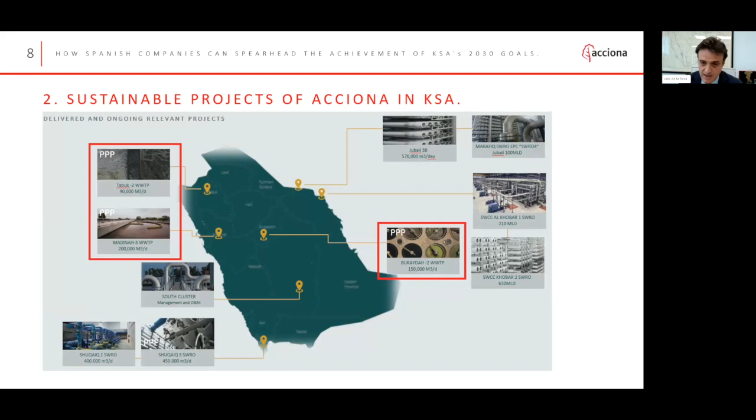We have developed 6 desalination plants: 2 units in Al Khobar in Dammam, 2 units in Shuqaiq, and 2 units in Jubail, one of them for Marafiq. This brings the total desalinated capacity of ACCIONA today in the kingdom to 2.3 million cubic meters per day, able to provide potable water to 9 million people here in the country, more than 25% of the population.

Many things have been said about the sustainability of desalination in the last months and years, and I can assure you that today the desalination plants implemented by ACCIONA are either carbon neutral or carbon positive. First of all, many things have been said about the brine. For you to know, before we decide to go ahead with any desalination project, a really detailed recirculation study is conducted before defining the point where we take the water and where we deliver the brine.

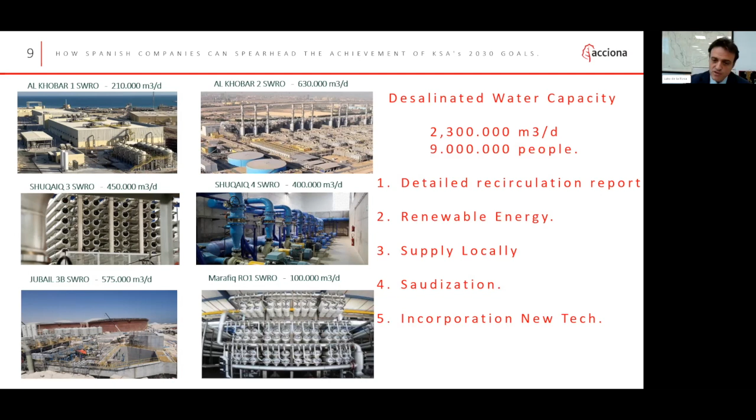We are incorporating renewable energy, trying to fit the plant with as much renewable energy as possible, mainly PV. We develop our relationship with local suppliers as much as possible, and incorporate Saudi nationals into the project as much as possible, always fulfilling the legal requirements. We always incorporate new technologies into all these projects as much as we can. And where is this taking us?

We are stating that we are able to provide potable water in an amount, quality, reliability, and affordability as much as possible. And you can see at the bottom part of this presentation, I referred before to the renewable part of the desalination plants.

Today, in an average desalination plant developed here in the kingdom, if we consider this rectangle as 100% of the plot for any desalination plant, what is purely the desalination units is around 35% of the area, while the photovoltaic part is around 65%. This is what allows us to provide between 30 to 50%, depending on the plant, of the total energy consumed by the desalination plant through renewable energy.

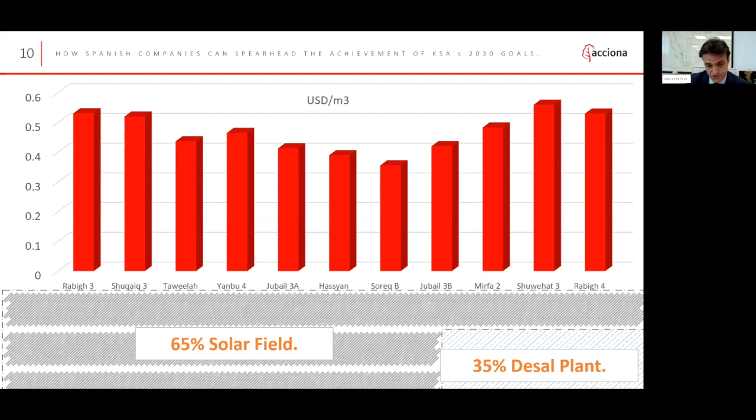So we have sustainable potable water, not only for urban but as well for industrial uses. We said that we incorporate new technology, but this is not something we said just for saying something.

It's something recognized worldwide. We got the Global Water Award, the distinction from the Global Water Award, for the digital twin that we implemented in Al Khobar 1. A digital twin is a digital replica of the asset we are about to construct, and this digital replica allows us to simulate how the asset will work. This allows us to optimize the consumption in terms of chemicals and energy of the asset.

As well, we develop the relationship with our local Saudi partner, in this particular case Saline Water Conversion Corporation, and we have a very close relationship with them for renewable and new technology. They even pay visits to our facilities in Spain to strengthen the relationship.

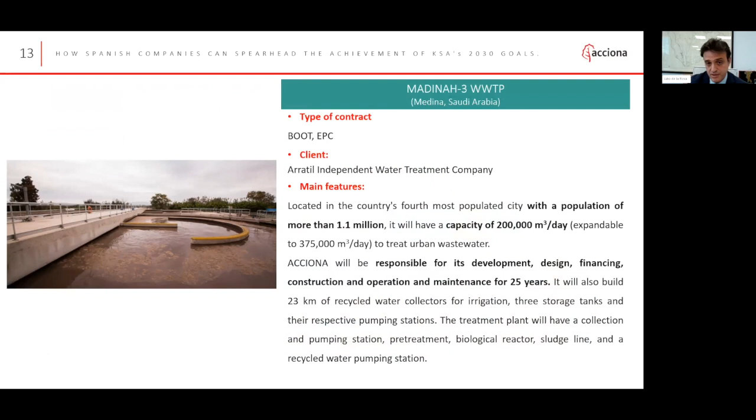This is for desalination. What about sewage treatment plants? We have provided the investment, the money needed to develop 3 projects here in the kingdom: one in Medina, 200,000 cubic meters per day capacity; another in Buraida, 150,000 cubic meters per day capacity; and another in Tabuk with 90,000, totalizing 440,000 cubic meters per day capacity of sewage treatment plants here in the kingdom, able to provide sanitation to 1.6 million people.

And this is maybe the most perfect example of circularity and sustainability in a water project. We take the raw sewage that you have at home or in any industry, we treat it, and we get treated water and sludge, and we sell this to farmers to irrigate crops, for food, for greenery in general. We also provide them the sludge as a natural fertilizer.

So with this plant, first of all, we avoid the use of fresh resources for irrigation, and at the same time reduce the use of traditional chemical fertilizers. As well, this plant is fed again through photovoltaic and the biogas produced in the plant itself through the methanization of the sludge we produce.

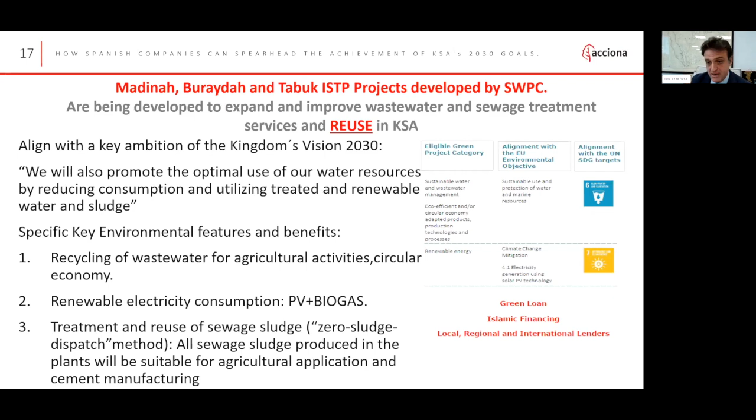So this project, as we said before, is the perfect example of a net zero project supporting the circular economy. This is why it was the first green financing project. What is a green financing project? If you present to the financial institution a project that is fulfilling some of the United Nations Sustainable Development Goals,

and you can assure that every single dollar invested in this project is allocated to a sustainable project, you can call a second party opinion, in this particular case ISP Global, to certify all this, and you can have access to what is called green financing. More and more investors, and Saudi itself, are promoting this kind of project. More funds are available for green financing projects, and at the end of the day, more availability means cheaper money.

And the last project I would like to present to you is the South Cluster project that we are doing in Saudi Arabia, in the region of Baha, Assir, Najran, and Jazan. This area is equivalent to half of Spain, for 5 million people.

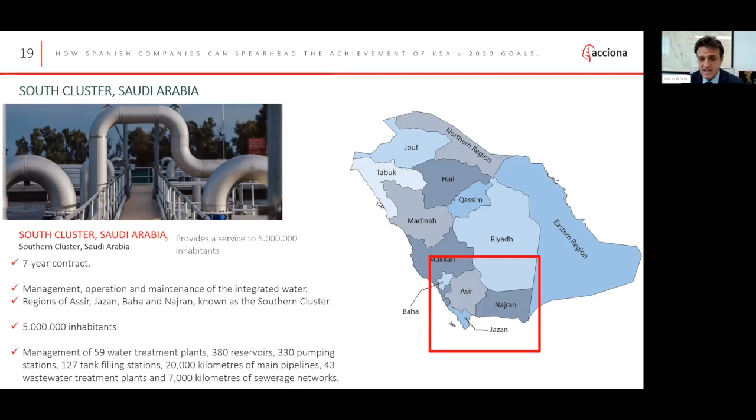What we are doing is helping the national water company in the transition from a pure public entity to a pure private entity, providing optimization in the 59 water treatment plants they have, the 43 wastewater treatment plants, and most importantly, implementing more efficient management skills in the whole water cycle.

So, this is what you are doing, but why do you consider that this is helping the achievement of the 2030 goals? Let's have a look at Vision 2030 under the PIF program. PIF is the Saudi Fund for Investment, the National Pension Fund of Saudi Arabia.

The target is divided into 3 levels, here I'm showing only 2. The targets are to grow and diversify the economy - ACCIONA is investing - and to increase employment - ACCIONA is employing people here in the kingdom.

To contribute to the growth of the private sector by providing potable water, we help industry grow. To maximize the value capture from the energy sector, we are implementing renewable energy. To unlock and grow the non-oil export, the water sector itself is a pure non-oil sector. And to further integrate the Saudi economy regionally and globally, we are helping, investing, and developing the economy of the country. So we are helping with this target too.

The Green Initiative consists in increasing the number of trees in the country from 10 million in 2021 to 600 million by 2030. Those trees need water, and part of it comes from the sewage treatment we are developing. We mentioned 3 locations: Tabuk, Medina, and Qassim. In these 3 locations where we have sewage treatment plants, this Green Initiative in Saudi Arabia increases the number of trees significantly.

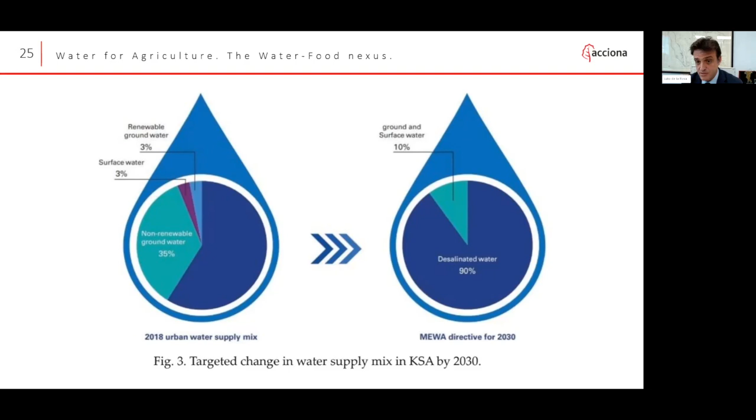As well, local content and Saudization. Saudization means employment of Saudi nationals, and localization means the use of local suppliers and companies. The requirements are getting higher and higher - right now, for operation and maintenance of water plants in the kingdom, the requirement during the first six years is 70% Saudi nationals, and from year 7 onwards, 90%. We are fulfilling this.

There are also requirements to incorporate local companies for operation and maintenance - right now around 30%, and we are fulfilling this objective. As well, more than 50% of the supply implemented in any project here in the kingdom must be local, and we are fulfilling this.

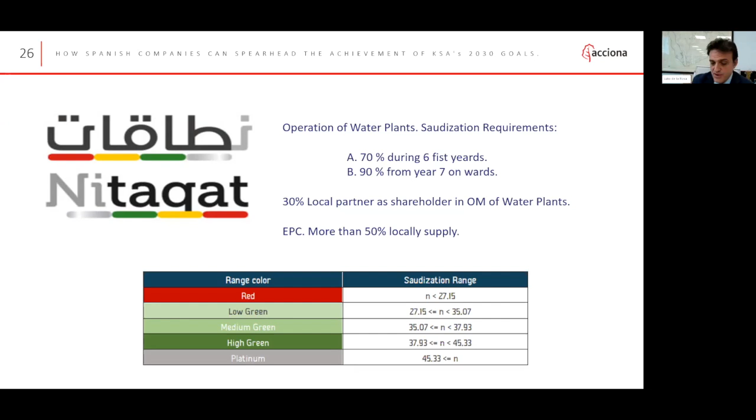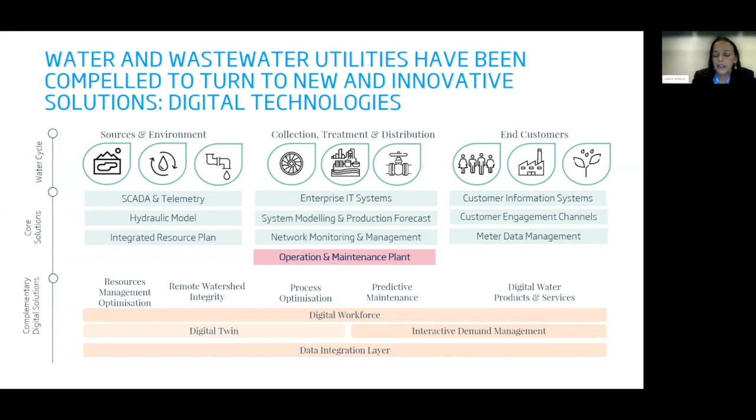Oblysis is technology focused on the transformation of the plant. We are focusing on transformation in the sludge. The activated sludge plant is going to transform into granular sludge. This means the granular sludge has a higher specific weight and certain properties.

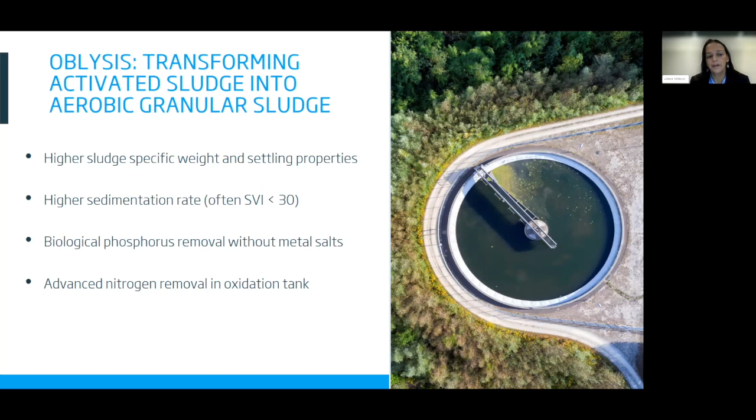The granular sludge has a high sedimentation rate with an SVI less than 30, biological phosphorus removal without metal salts, and advanced nitrogen removal in the oxidation tank.

Why are we doing that? Because we are looking to reduce different problems that we have in the plants. We are going to reduce sludge production, increase the capacity and quality of the water, help reduce chemical consumption, and adapt our technology to any activated sludge wastewater treatment.

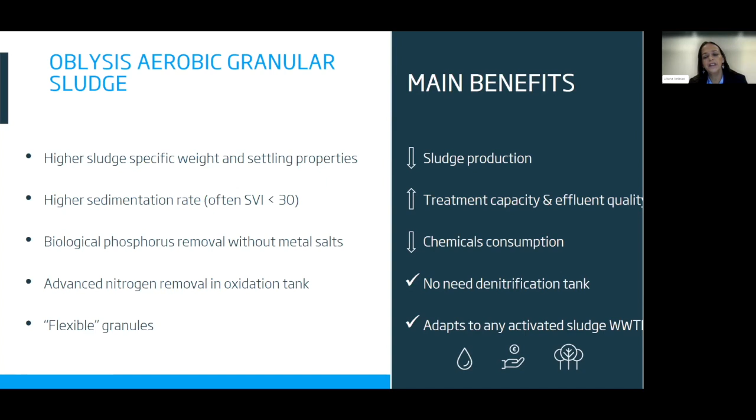How can we help different companies reach their goals? We can focus on the main problem the plant has at the moment, like capacity, water quality, or sludge production. We have the opportunity to focus on different goals, or you can balance the different objectives you have in the plant.

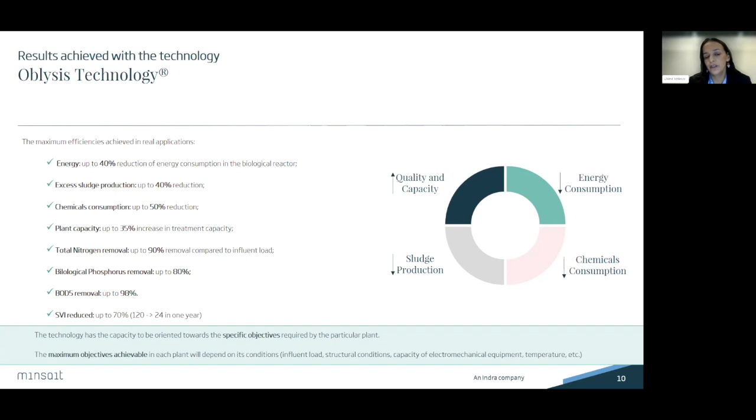How can we implement this technology? We have one part hardware, another part software. The hardware is a floating steel device. We are going to implement this technology in the biological reactor.

You can see the characteristics of this device in the picture. The physical dimensions are 2 meters by 2 meters by 2 meters. The weight is only 800 kilograms. Energy consumption is low, only 5 kilowatt-hours per day.

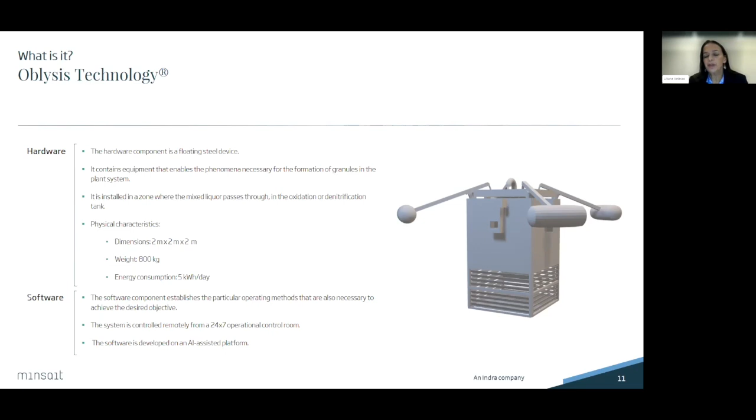We integrate this hardware with our platform. This platform helps connect different devices in the plant, and we control the process remotely through the control room, looking for the granular sludge formation in the process.

We connect the device with the aeration devices, the mixer, and the recirculation pumps, and we control these devices. We get information from the pumps, from the SCADA, and other devices, and we decide the best moment to start the aeration devices to get the best oxygen level in the biological reactor. This process helps transformation, and the flow gets inside the Oblysis device to transform the sludge.

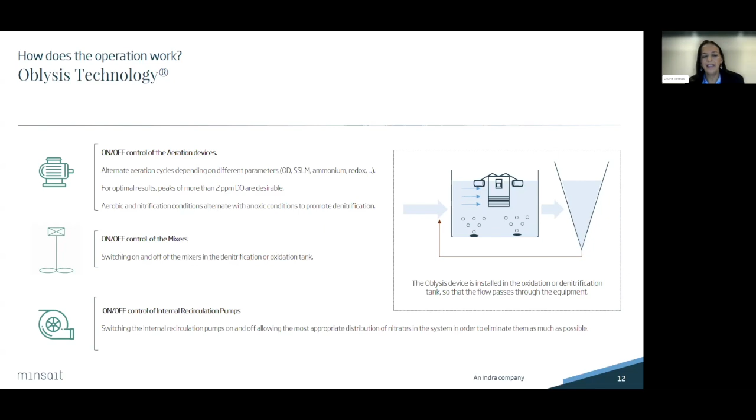What kind of plant can we implement this technology in? We can implement it in conventional activated sludge plants, Carrousel systems, or MBR with external filtration. The biological reactor tank size, 2.5 to 6 meters, is okay for implementing our technology.

About the aeration system, we have different plants with blowers, turbines, or submerged aerators. We don't have restrictions about size because we can adapt or implement different devices depending on the characteristics of the plant. We have to check what is necessary, how many devices are needed. About the type of wastewater, urban or industrial, it's possible to implement the technology.

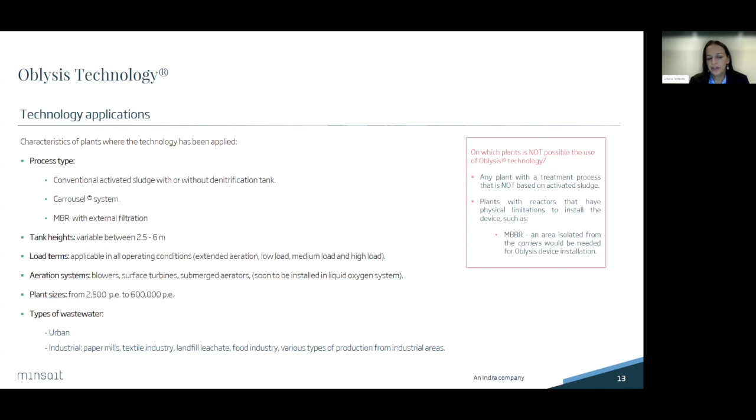We have different conditions needed to get the transformation of the sludge. The main characteristic is the oxygen level in the biological reactor. We operate around 2 ppm of dissolved oxygen. We have to review the technical point of view of the plant to check if adaptation is necessary, but usually you don't have to do any adaptation.

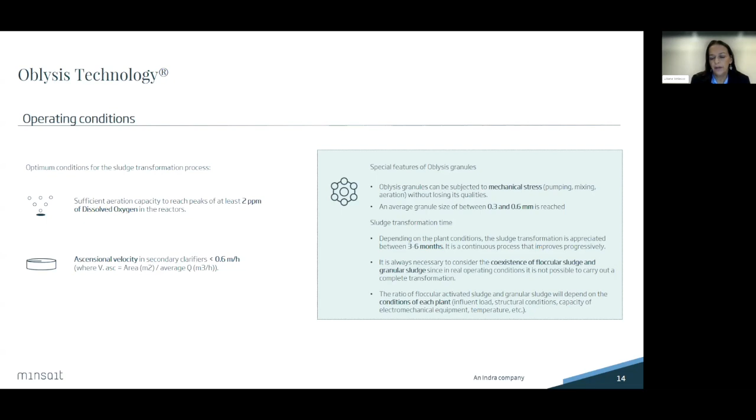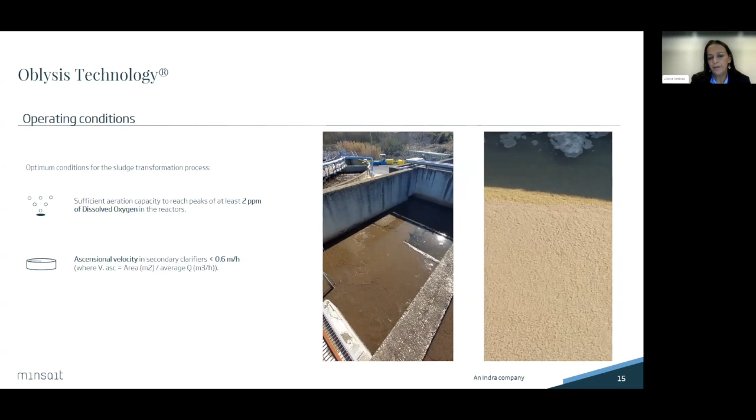You can see here some videos of the process, the sludge changing. It's going through transformation and helping achieve different goals. We work with the platform.

This platform helps the client control the different parameters that you want to control, because if you are focused on the characteristic of the effluent, we can review the parameters and control what happened in the plant, what happened with the different goals, because we have to identify the baseline we are going to work with when we start the project, and follow the different objectives that we have.

And the platform helps operate the device and look for the best opportunity to focus on the operational aspects of the plant.

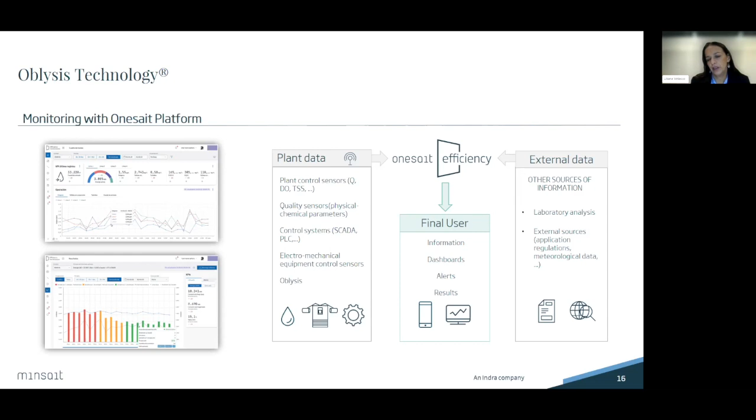How can we do this kind of project? The first step is we have to know the plant, the characteristics. We have to identify different parameters and identify different goals that you have in your plant.

Then we have to prepare, when we know this plant is possible to implement the technology, we are going to prepare the plant to install the device.

We can identify the different information of the plant. We can have the definition of the different integration, systems, or devices that we have in the plant to get information. After that, we have the information.

We have to install the device in the biological reactor. It's so easy, you only have to implement this technology in 2 or 4 hours. You don't have to do any modification in the plant infrastructure.

We have to connect to the aeration devices, and we have to calibrate. We need 2 or 3 weeks to calibrate the device, and then we can start the operation with the Oblysis technology, focusing on the different objectives that we have.

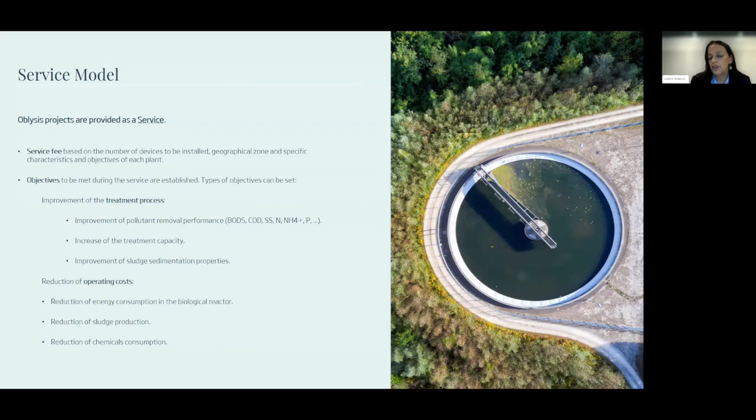This device, we have a service, we don't sell the device. We have a service model, the service fee. We have defined different objectives about the quality of the water, or maybe we have problems with operation cost. We can work on different objectives too.

We have different projects here in Spain, in Italy, in Portugal. We are looking at other countries to implement this technology, because we want to give the opportunity to understand how this kind of technology helps the plant.

This is the idea, for example in this kind of plant we have different objectives. Here in Spain, we have problems with the high cost of energy. In Italy, for example, the price of sludge management is so high. There's new regulation regarding the effluent, and it's important to control the quality and parameters of the water.

Okay, thank you everyone.

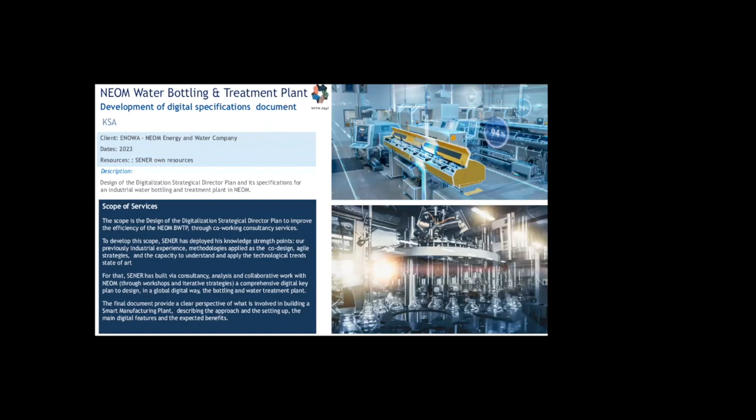We have been working with NEOM on different projects, developing materials and specifications and products in contact with water for treatment plants, sewage treatment plants, desalination plants, transmission lines, pumping stations, and also specific projects for water bottling and treatment plants.

Also helping NEOM with this integrated water management control system.

I want to say that SENER is not an EPC company for plants, but an engineering firm providing engineering services to the EPC companies in the bid phase, detailing, and construction phases.

Okay, now we are going to talk about water and desalination plant efficiency and sustainable design and management.

This is applicable to any kind of plant: independent sewage treatment plants, independent water treatment plants, transmission pipelines, water storage tanks, etc.

Rather than talking about the reverse osmosis desalination process that is well known and in continuous improvement of efficiency by equipment designers and manufacturers, I'm going to talk about the management of a desalination plant as an energy asset, from the design phase and also in plants already in operation, and how we can optimize the design of the plant and the operation of the plant from an energy optimization point of view.

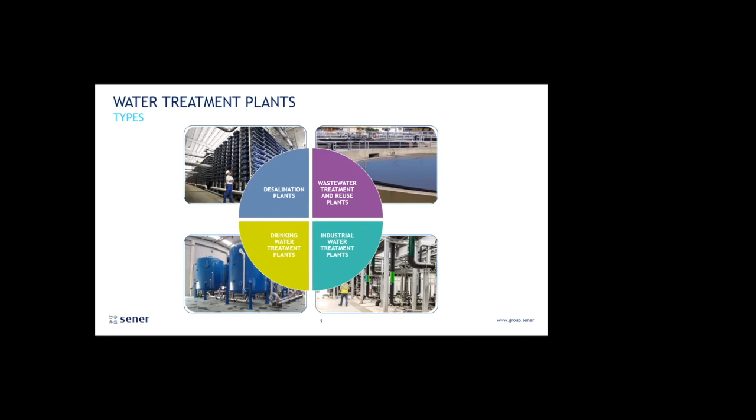These plants are intensive consumers of energy. This is well known, and our focus is to try to optimize this mix.

First of all, the traditional design procedures, well known. This habitual design process calculation, 2D and 3D plans. This is the initial design procedures.

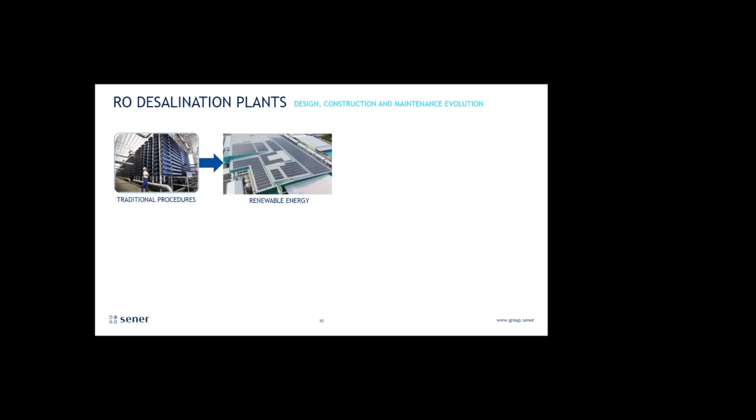Then renewable energy has been implemented in the plants. Also, this is a second step to the sustainability of the plants.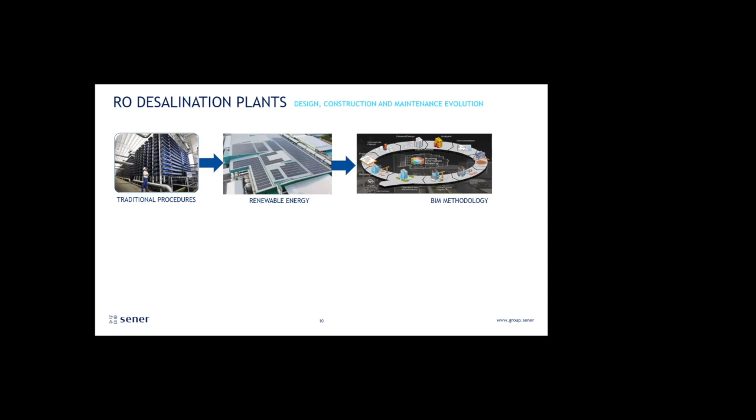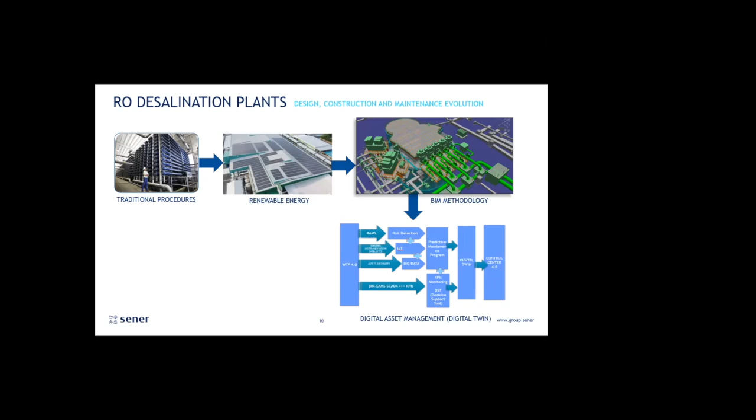Then the BIM methodology has been applied for years in plants for the whole life cycle of a plant, from the design to the end of its life. Some examples. Then the next step is to use the digital models of the plants, digital twins, control centers, intelligent control centers, using Internet of Things, big data, and all of these new technologies.

But we want to take one more step toward the sustainability of these desalination plants, and within this must be the optimization of the energy consumption. To do this, SENER has its own tools, applicable in the design phase and the plants in operation. This is the EMS and the DAE system.

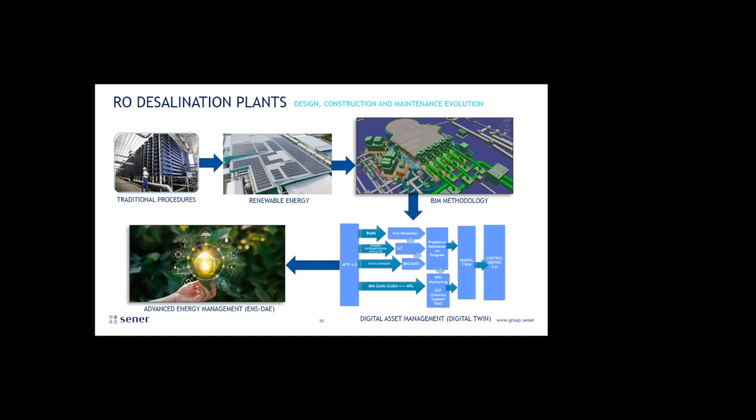This is a brief view of the BIM process. BIM is not a software - this is well known. It is a method of collecting and sharing facility information. So the BIM model is in fact a database composed of information from many sources. This database becomes more complete as the project progresses and is a live model.

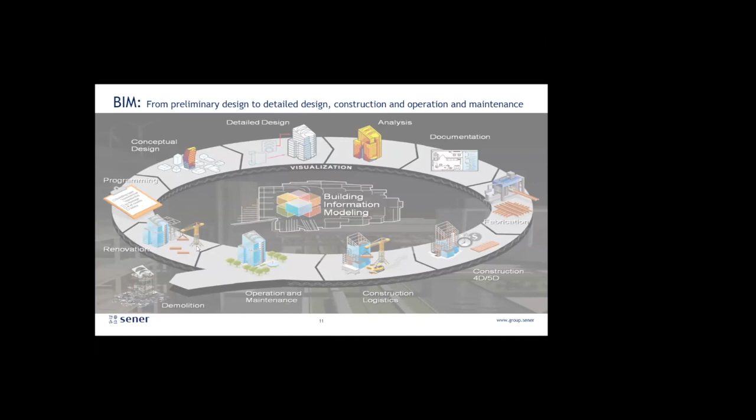Well, BIM is applicable from the preliminary design to the detailed design, construction, and operation and maintenance. The application of the BIM methodology helps to minimize errors in the design, construction, and operation and maintenance, leading to savings in material and energy, which contributes to the sustainability of the desalination plant.

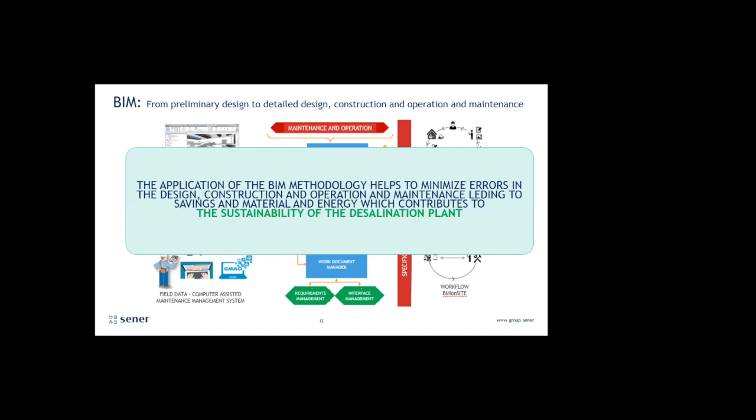This is a case study. This is the Taweelah desalination plant in tender phase. We applied the BIM methodology for this design.

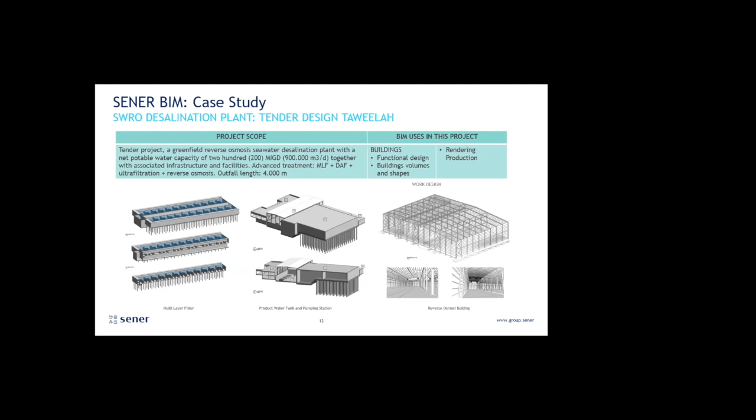And the next step after the BIM methodology is the digital asset management. This digital asset management has a lot of items and topics to take into account, so it is really complicated to manage this manually. You can see, manually, so we use...

Some tools, big data processing, to have a digital twin of the plant and an advanced control center of the plant.

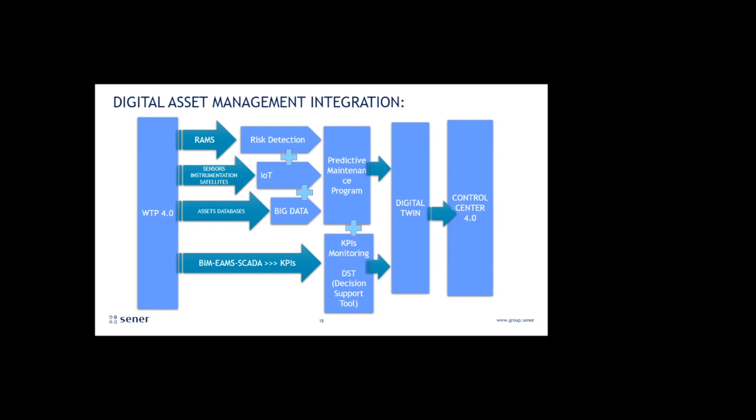So the new concept of digital asset management is focused on continuous monitoring - sensors, satellite, apps, and human contribution - which give the knowledge of the actual condition of the water treatment plant, enabling predictive maintenance with clear benefits: operation reliability and availability of the plant, life cycle cost saving through optimization of maintenance activities, and safety, as the number of incidents will be reduced.

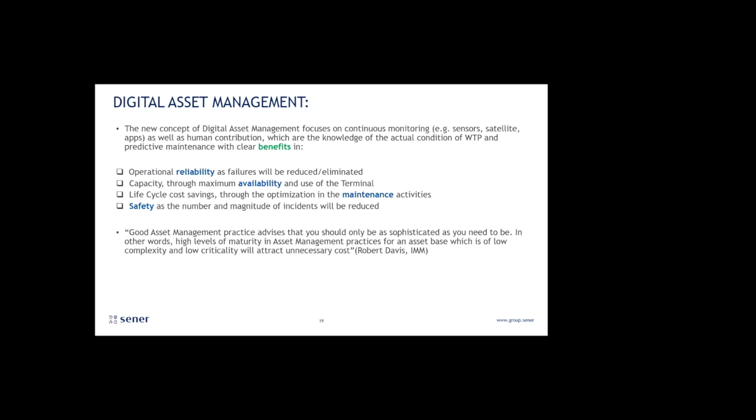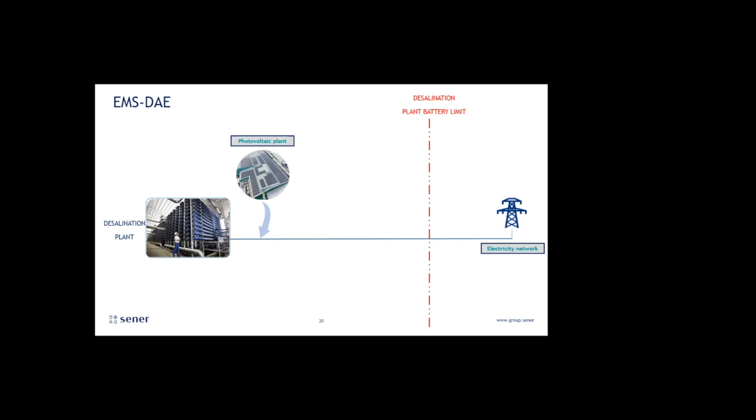Then renewable energies will be applied inside the battery limit of the plant, such as photovoltaic plants. We can also use eolic wind energy, onshore or offshore. And we have another available renewable energy, maybe hydrogen, green hydrogen. The desalination plants are installed on the coast, so it is possible that there could be use - they are close to ports where the hydrogen is transported for other uses, and take advantage of the supply to the desalination plant.

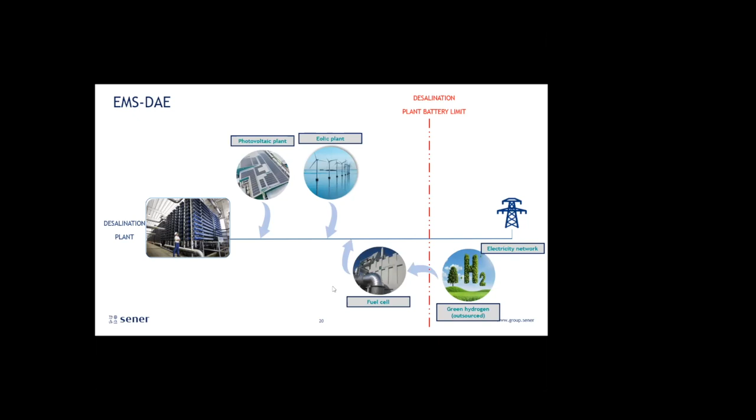Using fuel cells, we can generate electricity inside the plant using this green energy. Also, energy accumulation is necessary - the renewable energies are not continuous. Mostly photovoltaic and eolic are not continuous, so some accumulation is required.

Another option is to generate green hydrogen inside the plant using part of the permeate from the first pass, passed through a second pass and an electrodeionization, to produce ultra pure water to be used in electrolyzers, hydrogen electrolyzers, that through fuel cells can provide electricity to the plant. So we have a mix of many possible energy sources, and our focus is to optimize this mix of energy.

This is not about installing the maximum available surface for photovoltaic panels, or the maximum available surface for eolic energy, but optimizing any kind of this energy and its accumulation, to find the optimum in the design phase, and then in the operation phase to monitor in real time the consumption of any kind of these energies.

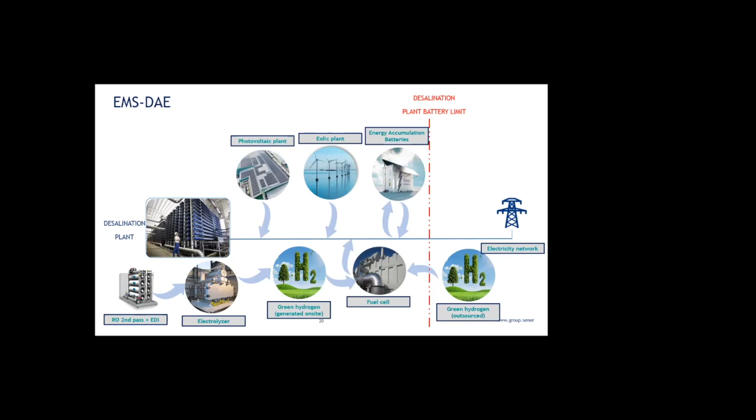So these are the tools we use, the EMS and the DAE. The DAE is applicable in the design phase and the EMS in the operation phase. So we have a mix of energies.

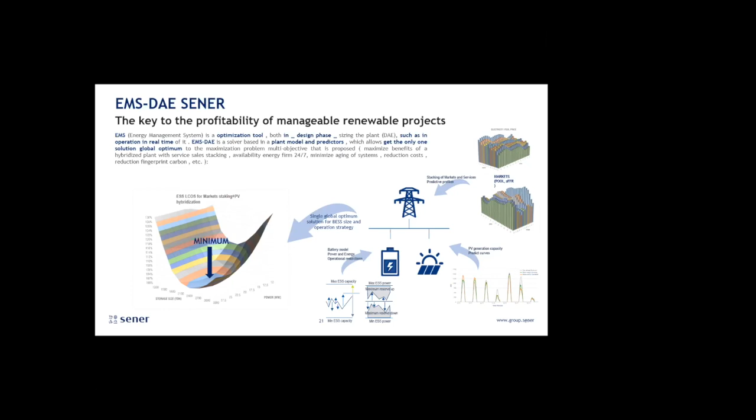We generate these graphics, and we find the minimum and optimal combination of these different sources to optimize the photovoltaic surface, the eolic surface, the size of the batteries, the accumulators, or even, if we're using green hydrogen, to optimize the size of the fuel cells.

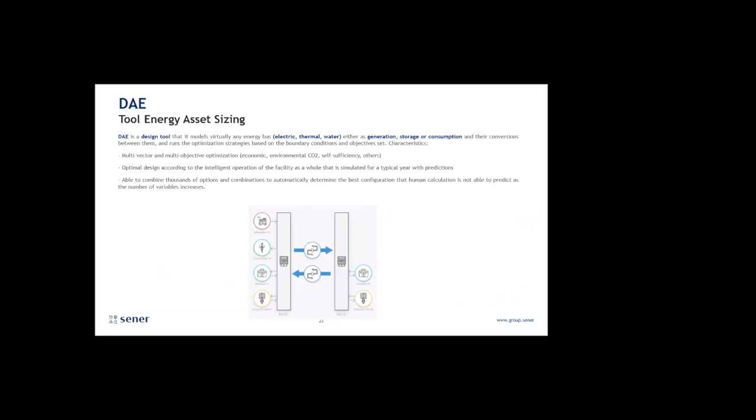As I said, DAE is applicable in the design phase, and the EMS is in the management operation strategies in real time. This is a tool. As I said, we find the optimum in the design phase.

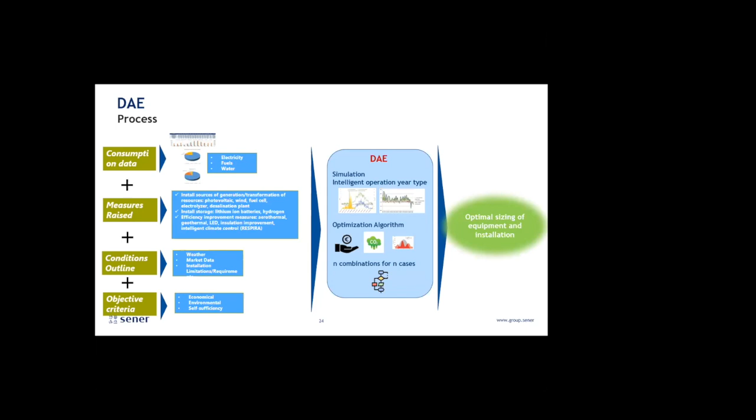We have the preliminary design, the basic design, and considering all the factors that affect the consumption, also the energy availability, the weather, any kind of criteria that can affect

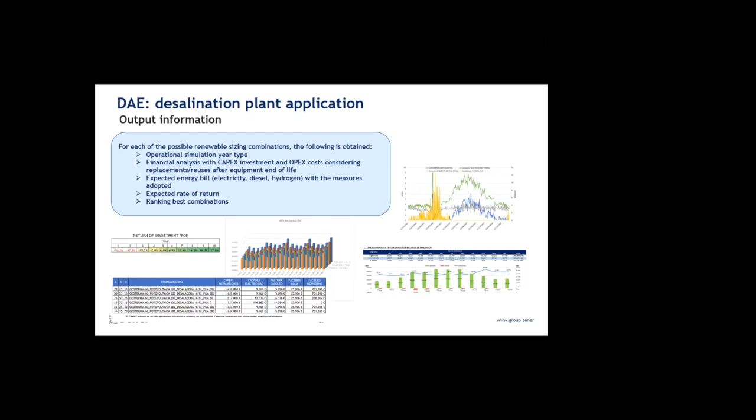Then the EMS, the energy management system, is a tool which provides an optimized service for energy use in real time, depending on the climate conditions. If there is sun or not, more wind, less wind.

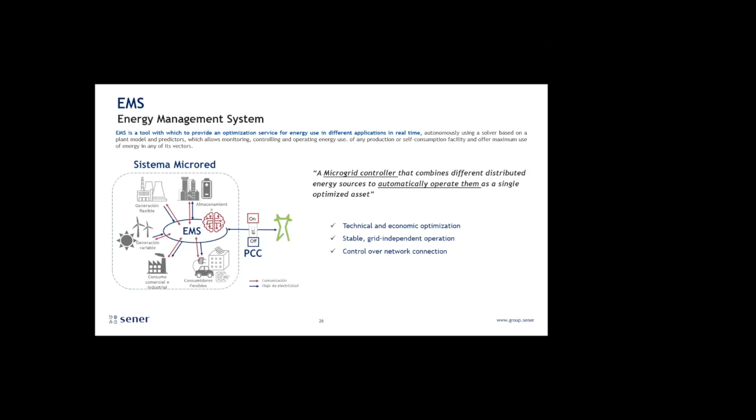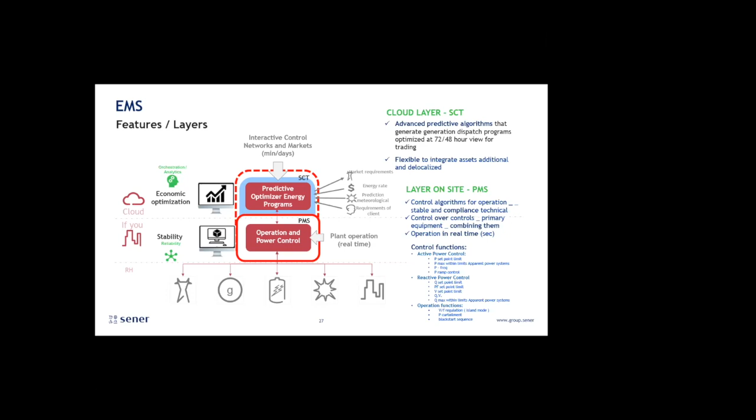Hydrogen available in real time, the system optimizes the mix of the energy used in the plant. So this is a predictive optimizer energy program. This has a lot of layers with the objective to optimize in real time the energy consumption of the plant.

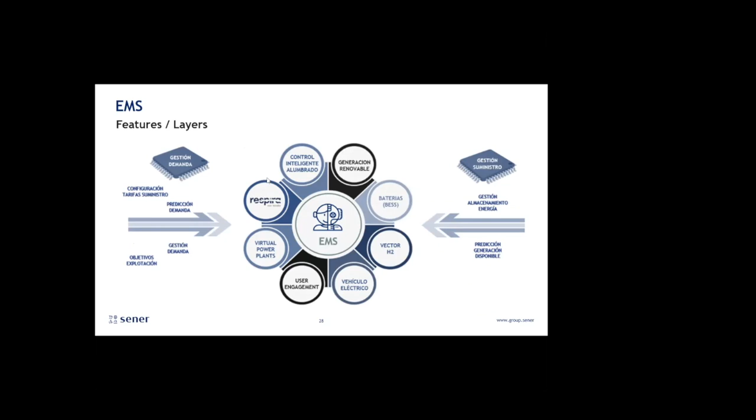And that's all. Thank you for your attention.